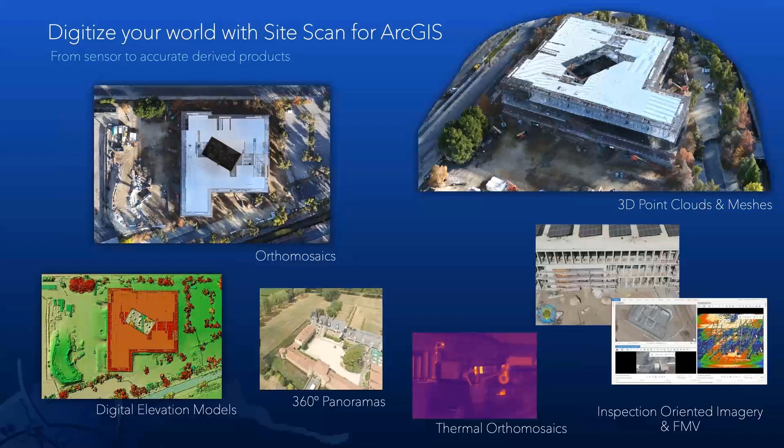The Sitescan workflow can be broken down into 3 steps. First, we plan and capture our data using the Site Scan iPad flight application, which supports a variety of drones. Once images are captured, they're uploaded to the Site Scan Manager cloud for processing. This is where users can perform first phase analysis on the data, then publish it into their ArcGIS system for advanced analysis and integration with other data components to really start creating a true digital twin. For those who work in a CAD environment, there are also integrations with Autodesk that connect with your broader GIS system.

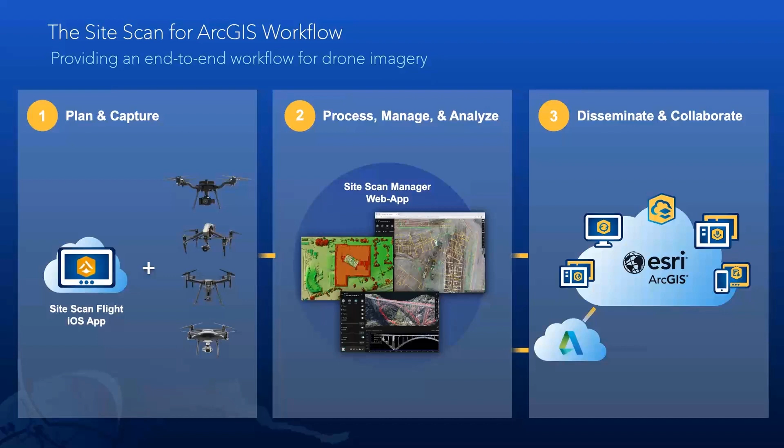Starting with the flight application, we worked with the teams in Taiwan—the Taiwan Fisheries Agency and IDT—to plan flights together. Because the flight application is cloud connected, we were able to plan a flight from California and share it with the teams in Taiwan to execute. The flight app offers a variety of flight templates, shown as different icons on screen, whether you're mapping large areas, scanning a 3D structure like a building, mapping roads, or doing manual inspection flights. The flight app also handles fleet management and pre-flight checklists, automatically keeping track of who's flying a drone, which drone, where, and with what battery—so when you have a large drone program and organization, all that information is handled automatically.

When it comes to flight planning, Sitescan is quite unique because it has functionalities only possible for a product that's part of the ArcGIS system, like the ability to bring in 2D and 3D content from the Living Atlas of the World or from your own GIS database. It has the ability to follow terrain, and it has capabilities for planning flights in 3D, which I'll show you in a quick moment.

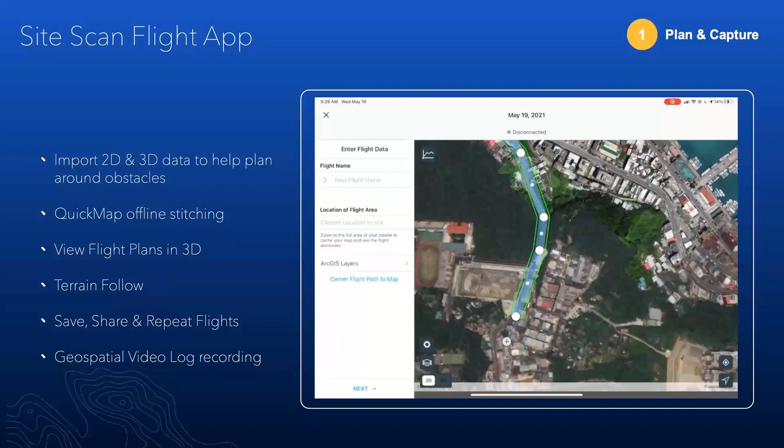Maybe we've decided that we need to map this road that leads to the port because we did not do that the first time. So here we're using the corridor scan flight mode. The challenge is that this road is on a very steep hillside, but thanks to Sitescan's terrain follow, the app will automatically plan a flight that follows the ground at a constant height. This means you'll have a safe flight, but also constant image resolution and constant overlap between your images, which will produce better results.

We're also able to load other 3D content, in this case a 3D mesh, but it could be utilities data, property parcel data—anything that you have in your GIS environment can be loaded in the flight app to assist with flight planning. So now let's take a look at the actual data capture from the teams in Taiwan.

They came out in the field and opened up their Badouzi Port project and loaded the flight plan. On that day, they were flying a Phantom 4 Pro V2 and reviewed the flight setting as a precaution, then completed their pre-flight checklist. This checklist is fully customizable to meet the needs of your organization and your government agencies, then they go through automatic system checks on the drone.

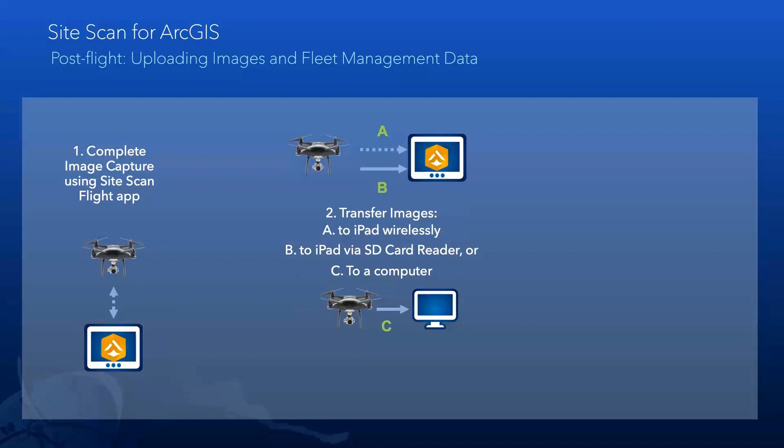In all cases, your data gets uploaded straight to the Sitescan Manager cloud. And the fleet management data will also sync with Sitescan Fleet Management as soon as your iPad connects to the internet. So that will send information about the drone, the battery or batteries, the pilot, as well as the responses to any checklists that were completed.

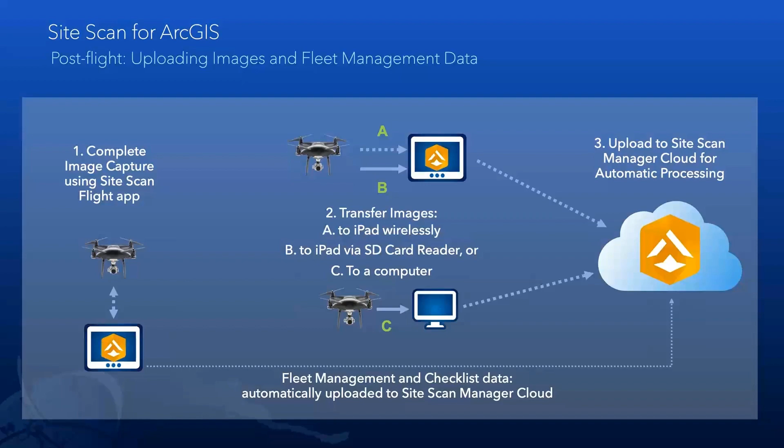So while our data is processing on the cloud, I'll talk to you a little bit about Sitescan Manager. This is a web application, so anybody can access this from their web browser without installing any software. And it provides some analysis capabilities and some collaboration tools, and most importantly, the ability to push that data into your GIS. It includes unlimited cloud processing of your drone imagery, as well as unlimited storage of your drone data. And we provide secure cloud hosting, currently either in the United States or in the European Union.

There's a lot of tools that are really intended for your less technical users, so people who maybe aren't GIS experts. We try to give them the ability to make use of this data without having to download massive files or have any software installed. They can perform linear measurements, volumetric analysis, generate reports, and share the data through links that can be emailed and don't require any login credentials.

And what's also very important in a lot of cases when we're creating a digital twin, especially when we're integrating different pieces of data from different sources, is producing high accuracy data. And for that, we offer different ways to improve and verify the accuracy of the data produced by Sitescan.

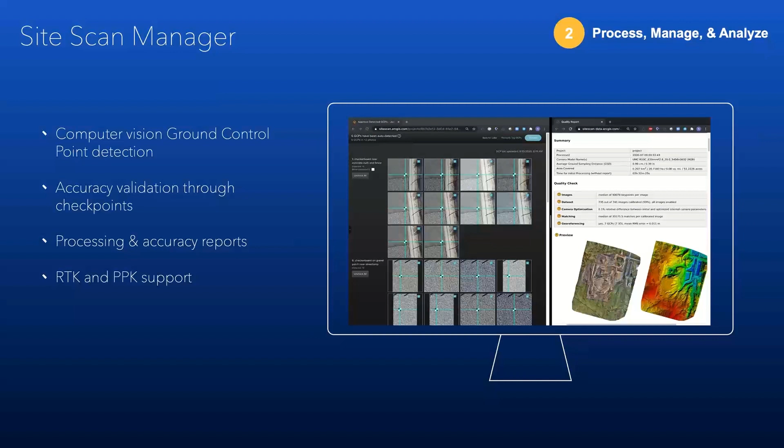So we just got an email that our results were done processing. In practice, this flight took about 7 hours to process. It was 1,250 photos, and so I would get that email. Any other member of the project who requested notifications would also be notified that there's new data in our Sitescan project. So let's take a look at that.

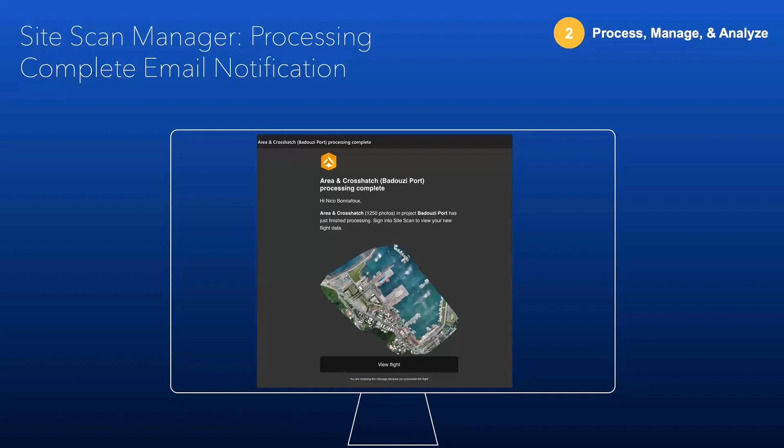So here I'm just on my web browser on Google Chrome on sitescan.arcgis.com in the IDT Sitescan organization. There you go. We'll see, so we see that we have only one project that I'm a member of in this organization, and it happens to be our Badouzi Port in Taiwan. So I can click here, and this will bring me to our results.

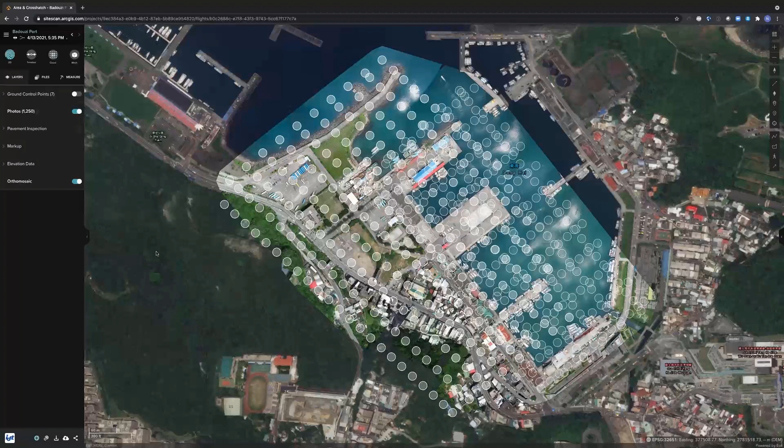So immediately we're brought to this 2D view display of the orthomosaic overlaid on top of Esri's satellite base maps. And so this flight, we can see here the 1,250 photos that were used to generate our orthomosaic, our mesh, and our point cloud. And you'll see that this is a very high resolution base map.

And actually, if you download this, you'll see when Daniel brings this into Pro, it's even higher resolution when you bring it in locally. So we have this orthomosaic viewer that's accessible to anyone. We can view our photos.

We have the ability to make markups. So if there's an area we want to identify and communicate that maybe shouldn't be accessed, that can all be done from here very easily.

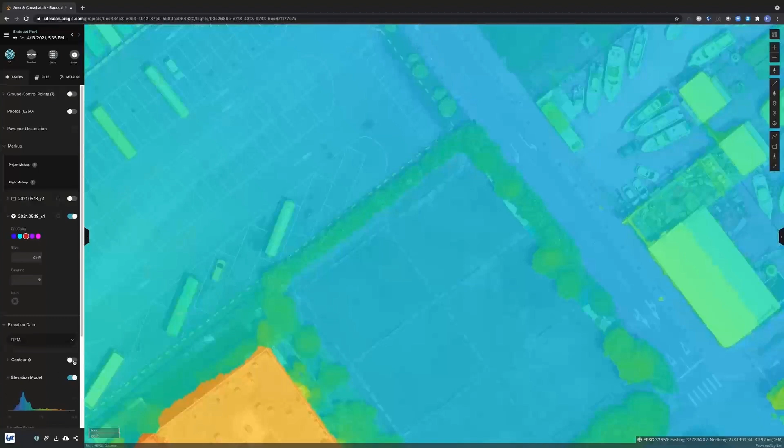We have the ability to display elevation data in different ways through an elevation heat map, or generate contours directly on the web. So I'll take a moment with all the water here. There we go. So you can generate contours at any interval you'd like and export those as shape files.

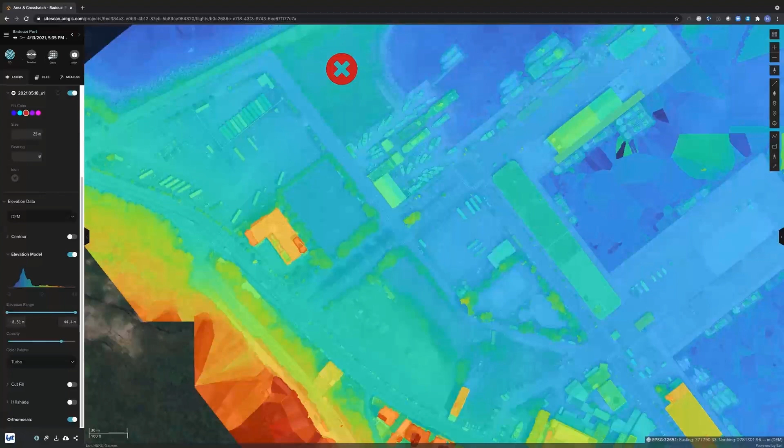We also have the ability to view data in 3D, so we can jump to our point cloud viewer. What's nice about the point cloud viewer as compared to the mesh, it's less pretty to look at, but it doesn't interpolate any information, so it's very accurate data.

And this point cloud gives us several tools. So this is just a preview of the full point cloud, limited to 10 million points. And this point cloud is over 100 million, so we're looking at 1/10 of the resolution here.

But we have some tools that allow us to do quick measurements directly on the web, like measuring a height.

Another tool that's really interesting is the photo inspection tool. So if you want to look at a specific area, you see that something's looking a little strange about this building. The photo inspection tool will pull up all the photos that show a specific point and allow us to go look in to see if there's any damage, for example.

And so it looks like there may be some damage to this roof here. So that's something that could be marked up, saved, and generated as a report for future use.

And lastly, I will show you our mesh. And here I'm showing you something that's not released yet in Site Scan. It will come out during our big user conference in July. And this is the new Sure Mesh Engine processing.

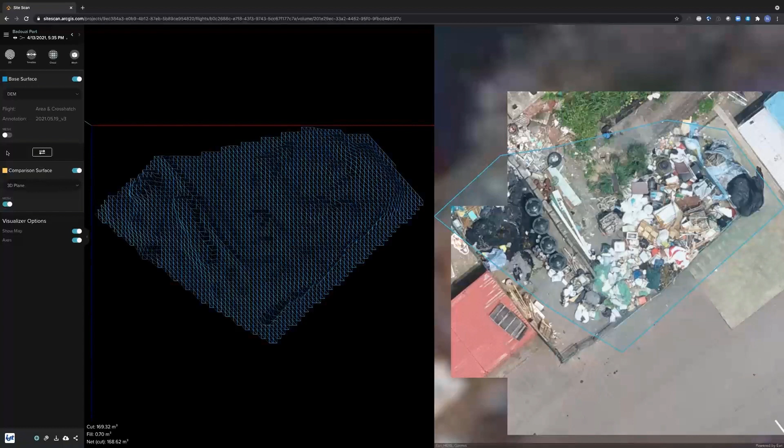So a tool that's available here is the volume tool, and that allows us to just click around very simply. And we'll get a volume immediately, and you can even go into a 3D view to then visualize what you've just scanned.

And so here we have about 169 cubic meters of trash, so probably about 10 to 15 trucks would be needed to remove that. So it's actually a good amount of debris that we need to take away.

But we'll let Daniel here focus on our new buildings and redevelopment of the port.

So rather than exporting the data locally, which can take some time because these files are so big, what I'll do is simply publish to ArcGIS Online or ArcGIS Enterprise, and I'll choose to name my project.

I'll choose a folder, so maybe I'll create a new one here, call that Badouzi. I'll choose the team members I want to share this with, so let's do our engineering teams today and our GIS and BIM team. I could add tags or a description and choose the outputs I want to share, and then I'll simply publish.

And so in a few moments, Daniel will have this data available in ArcGIS, and we'll be able to take over from here and create a true digital twin. So Daniel, I'll pass it back to you.

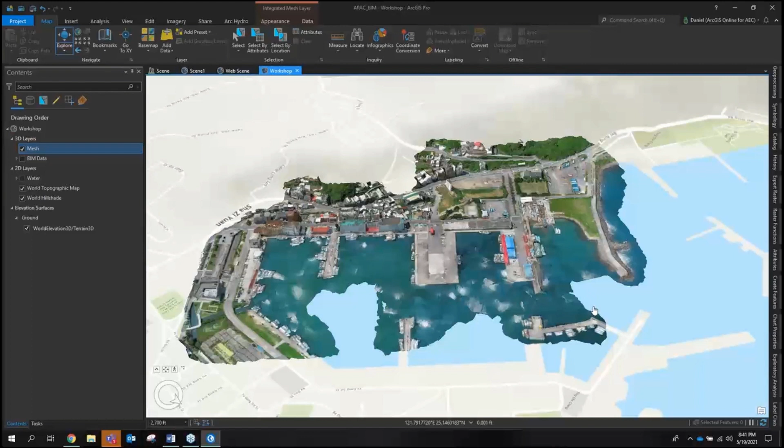Now, fortunately, ArcGIS Pro has some nice capabilities, new ones starting with ArcGIS Pro 2.7, and I'm here using our latest release, ArcGIS Pro 2.8. We'll show off some of those mesh editing capabilities.

So for example, we have our water, and I like to look at it directly from above, just as our drone did. Now we can clip manually by drawing with our mouse in Pro, or we can be a little bit more accurate. I've created a feature class of the water area that we intend to clip today, and this will be our input in the mesh editing process. And that looks like this.

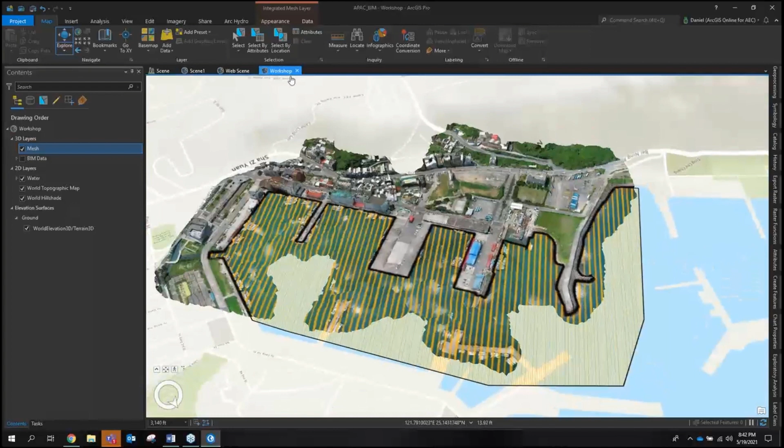We simply see our integrated mesh layer functions, and we'll add a new modification. In this case, we'll import from an existing polygon feature layer, that being our water feature. We have 3 operations: we'll be using clip for this function. Mask is for essentially isolating an area of your mesh, such as a building or any feature you'd like to isolate and highlight on your mesh. And then we have replace, which is basically just flattening the mesh—so where we have existing buildings and BIM data for those buildings, we'll actually be flattening that.

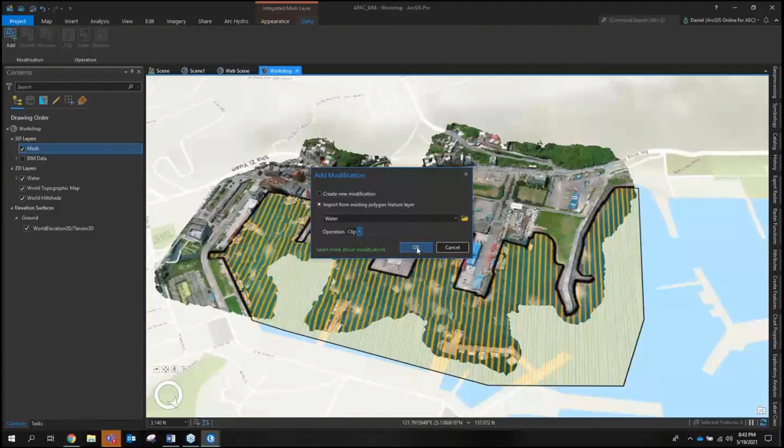So first we'll clip the water out. It's a fairly quick process.

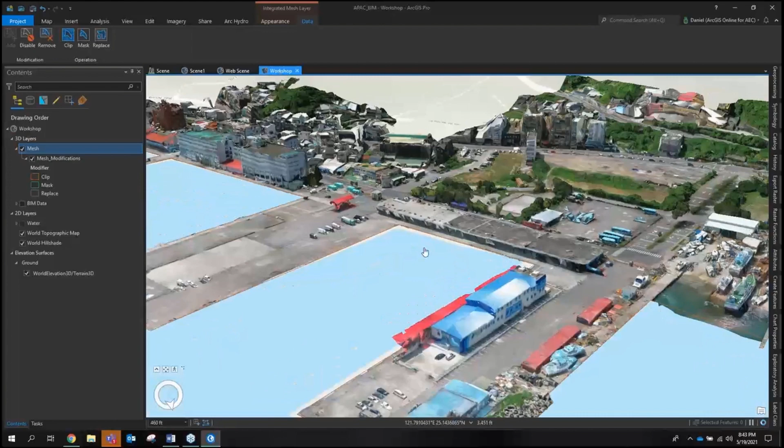We turn off our water. We can see that we've now clipped all the water from the mesh, so this can be a less distracting representation of the port. And now over here, we can see that we have existing structures in place.

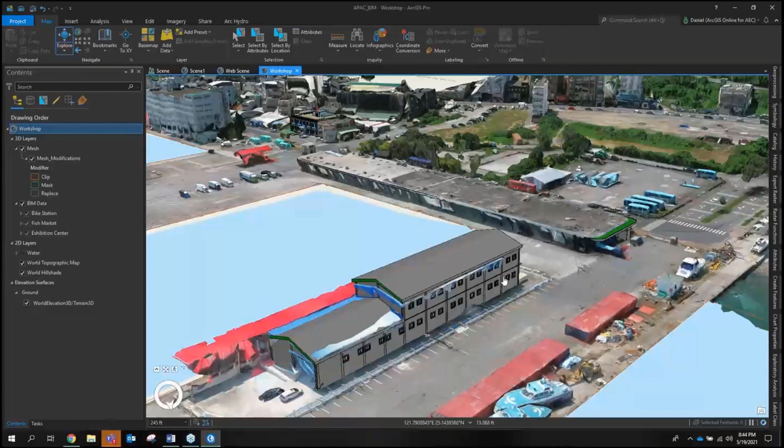I'm just going to quickly highlight where we have BIM data. If I turn it on, you'll actually see it shoot out from the mesh. So these are areas that we actually need to flatten in our mesh before we publish online, that way we can view our BIM data unobstructed. We'll do that with another mesh editing process.

So we'll highlight our mesh, and then we'll use replace. Up here is the fish market, and we're simply just drawing a polygon around it. We'll also clip out where we have a government building over here, and we also have another building here. You don't have to be very accurate, it's just a simple few clicks.

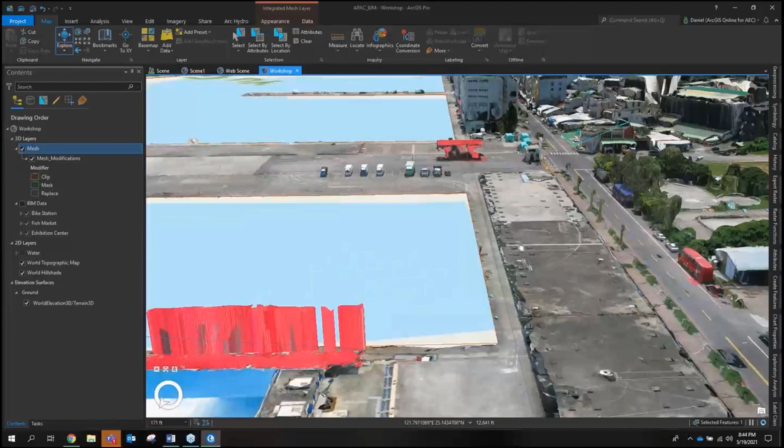If we explore the map, we can see exactly what we just did. So we flatten this building here where we have a bike station. We flatten this area with our fish market, and we left a little bit over there, but that's okay.

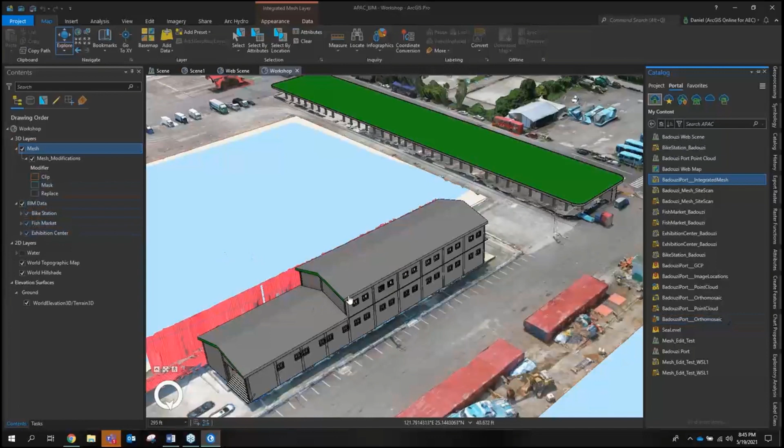For our government building, we'll turn on our BIM data. Once again, we brought in these Revit models directly through BIM Autodesk Construction Cloud connection directly in ArcGIS Pro. And then with a few small functions, we were able to create scene layers that we are displaying over here. So let's go ahead and we'll have this published to ArcGIS Online, and we'll jump in there next.

In ArcGIS Online, we manage data through groups and folders, and we specify specific members to have access to these data sets, as well as applications, maps, and any other item that we have in our group. You can see just how much data we have in here, mostly from our Site Scan process. So the reality capture process captured a lot of information.

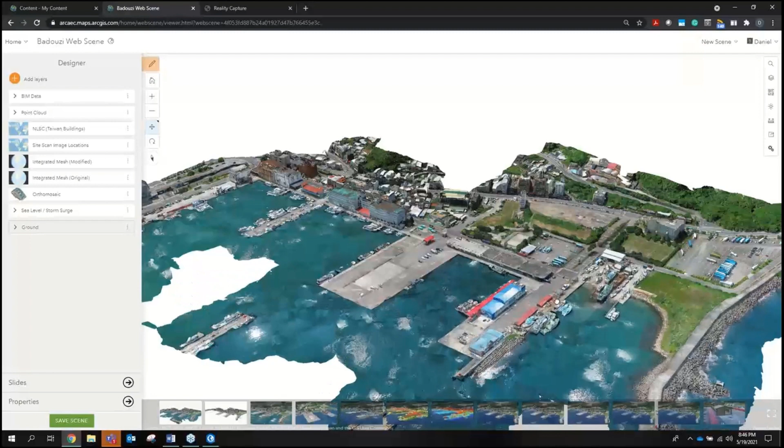So in a way to combine that information together, all the reality capture data, the mesh that we edited, we can bring that all into a web scene. And what we're looking at here is actually the mesh before we edited it, so you can actually see exactly how it looked in Site Scan. Then a quick edit in ArcGIS Pro, as we saw earlier, we now have our edited mesh.

And we can start to bring in contextual data around it to give this a true representation of the built and natural environment around it. So we have our integrated mesh, and we actually have a national data set of multi-patch buildings for Taiwan, just to give it some more context for the area around the port that we didn't fly.

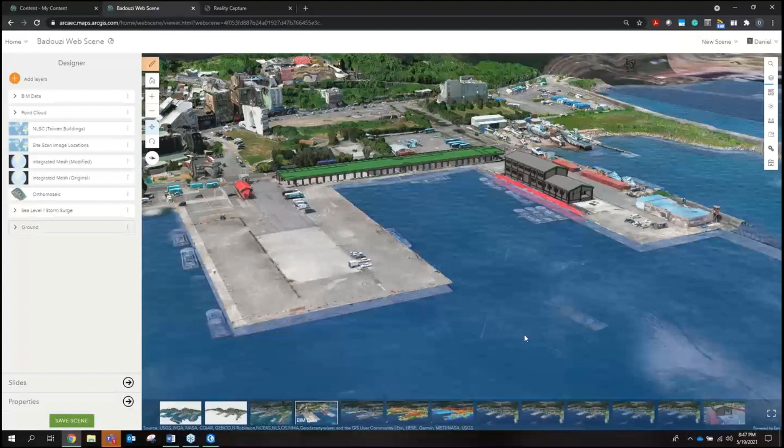Now we can turn off that data set, and as we just saw in Pro, we can view our Revit models as well as a nice animation of the ocean water. So we can see everything in here from our integrated mesh to our Revit data, and we can also view the point cloud data as well.

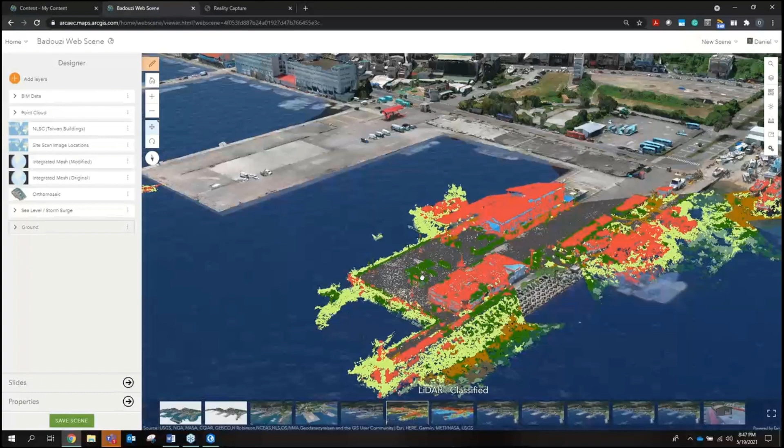Here we have colorized point cloud, giving it the same representation we saw in Site Scan. Here we have a classified point cloud, also from Site Scan. The classification of this point cloud data actually occurs in the scene viewer, how we specify how it's classified. So we have the natural ground, we have vegetation, and we have buildings, but we can also display elevation.

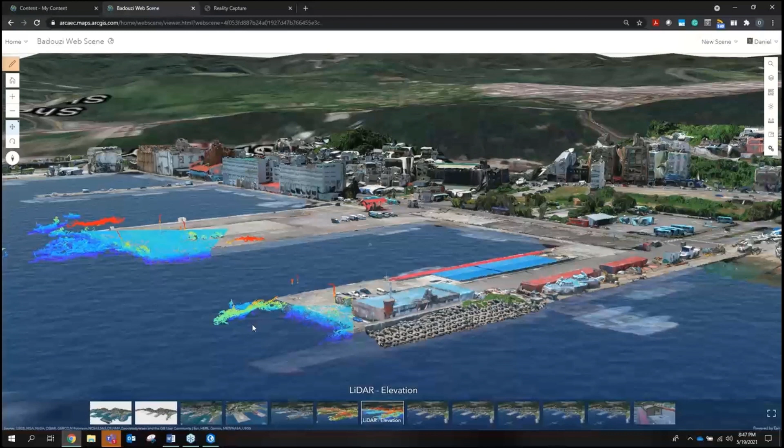And what this actually gives us access to is being able to visualize a common port scenario. Ports are very vulnerable to the environmental impact of sea level rise. So a simple point cloud showing elevation can show us what is going to be more vulnerable at the lower elevations versus the lesser vulnerable elevations of the built structures, the roofs, and so forth. And we can quickly identify that through the scene viewer.

So let's go back to our first steps of our digital twin representation. We have our BIM data, we have our integrated mesh from Site Scan, we have our ocean layer, but let's also look at the sea level rise in itself. So here we have a base layer of what it is currently today.

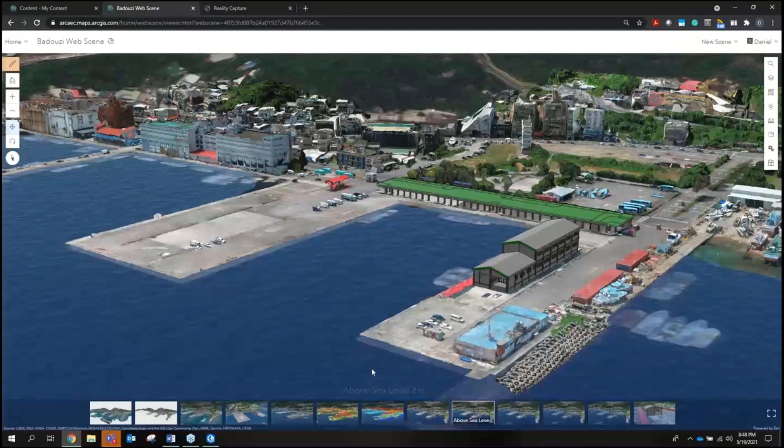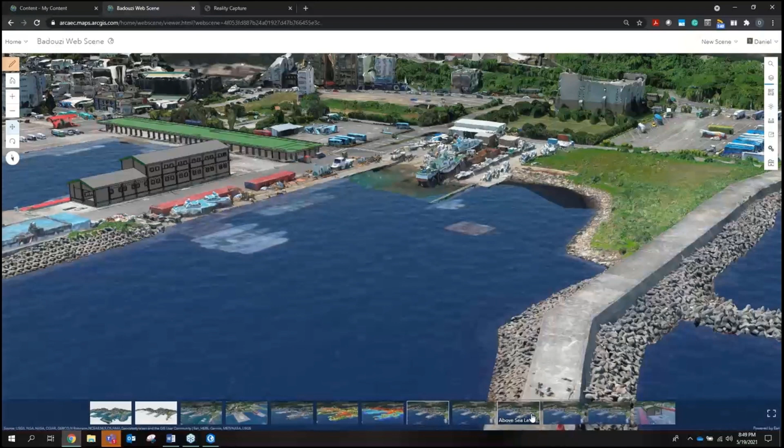And if we rise it by 2 meters, it hasn't really affected much yet. Now, if we raise it to 3 meters, we can start to see over here the water is actually rising up closer to the ground. If we go back to that first one, you can see it hasn't quite hit the land yet, but now that we're at 3 meters, it's starting to get very close to the structures on the port. And at 4 meters, we actually see it affect the port.

So this digital twin representation at its early steps is already giving us a great representation of how the natural environment affects the built environment.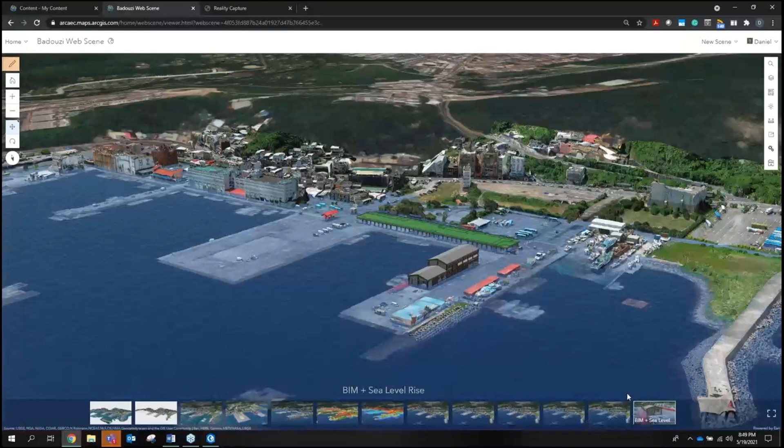And actually, we can zoom in a little closer to one of our BIM models and see how this structure was actually designed to account for a sea level rise. We can do that through various tools that our scene viewer application comes with straight out of the box through ArcGIS Online. No coding necessary.

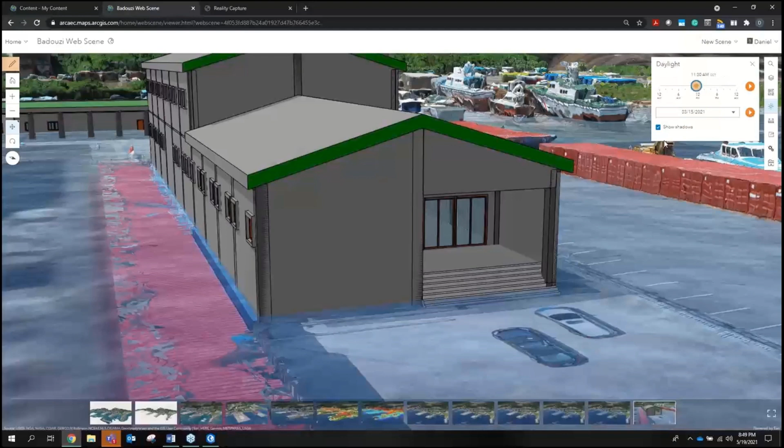We have a daylight tool, which can actually show you different daylights, such as this. But we'll turn off the shadows for now, because what we'd really like to look at is the building slicing tool. So we can slice through this building and start to see how it was actually designed with sea level rise in mind.

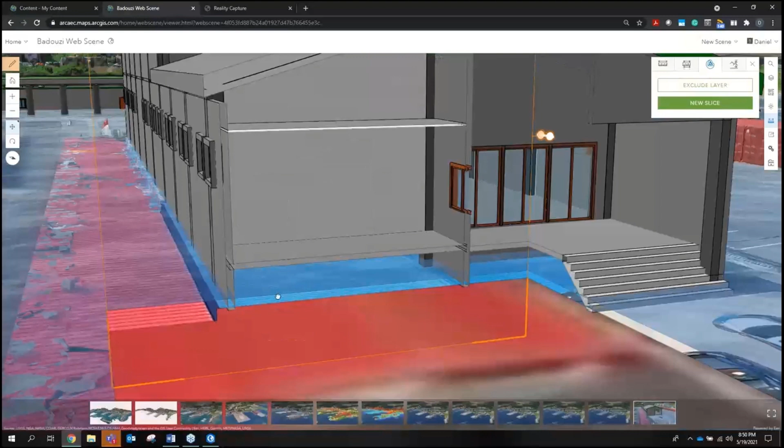We'll give it just a quick second here. You can see this is fully dynamic on our scene viewer application. And we can see at the 4 meter sea level rise, it's actually not in the building yet. It's below the building, because this building has actually been designed to account for this sea level rise.

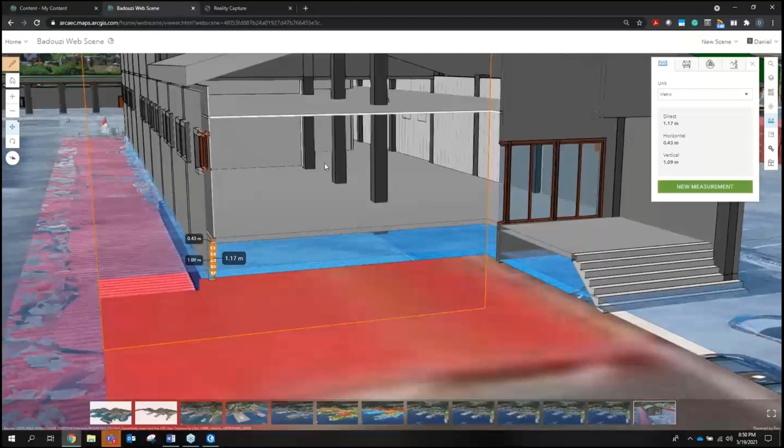And we can measure that — just how much sea level rise this building has been accounted for. So if we're already at 4 meters, then above 5 meters, we might start to see some water actually get into the building itself. This is really great information we can feed to our stakeholders and anybody who is an audience of this project, or maybe the builders, the construction crew, and the architects, all wanting to see how this operates.

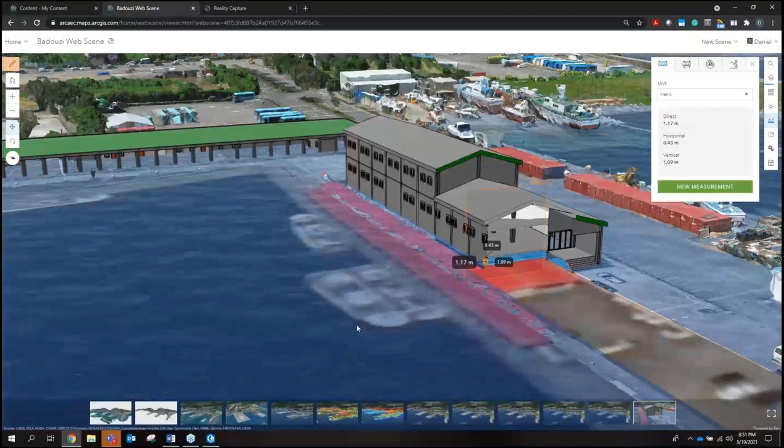So to create a more engaging piece to share with our stakeholders, we're going to use what we call Hub. Hub is an engagement platform formed around projects, issues, and initiatives, and it brings together data in ArcGIS applications to create a more efficient digital deliverable mechanism that engages the project audience through a story-like structure with engaging content, such as a project overview, maybe goals — in this case, our workshop series, and our next steps in the digital twin creation process.